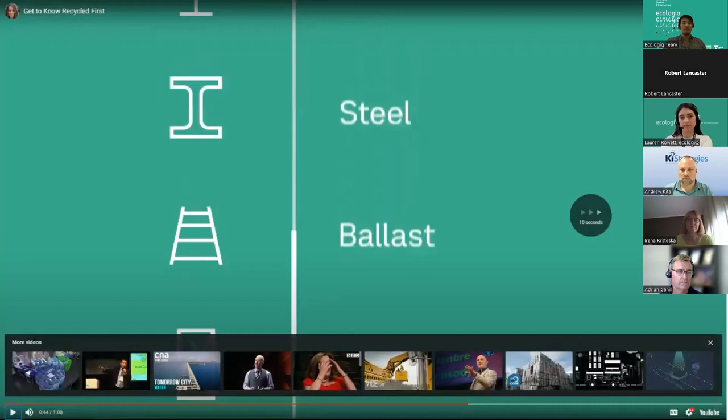The Recycled First policy. Recycled First will require transport infrastructure projects to optimise the use of Victorian crushed brick, crumb rubber and reclaimed asphalt pavement, taking precedence over virgin materials. For information, technical advice and support on bringing your sustainable project innovations to life, drop ecologiq a line. Recycled First, supporting purposely greener infrastructure.

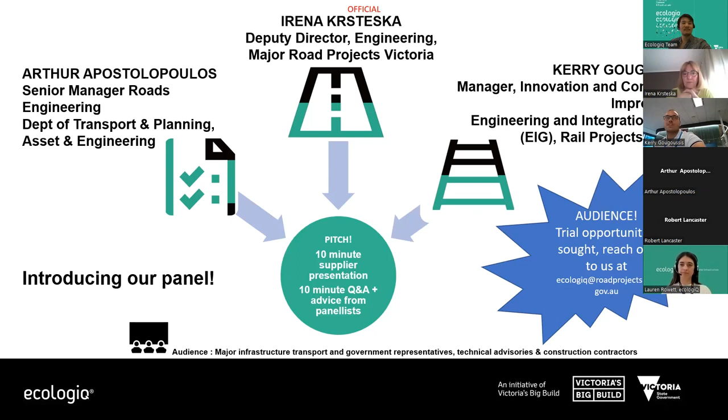Fantastic, thank you Kerry. So as you can see, very much a collaborative approach. I said earlier that these events are very much a call to action, because out there in the audience, you're working on live projects. There's opportunities to really push innovation, drive the uptake of these materials beyond compliance, as well as making them business as usual. So whether you're an asset owner, or working in design, engineering, or construction, the ecologiq here is very much about leveraging the big build opportunity and your projects to see circular outcomes for Victorian industry.

So I just want to go through a quick whirlwind tour of previous showcase participants. About 2 years ago, when we kicked off this series of events, we had a social enterprise called OC Connections come and put forward the idea of collecting old road bollards to convert them back into new ones. They launched at the end of last year, and that's now available - you can go onto their website. We're happy to see these bollards starting to be rolled out across the big build, as well as Melbourne Airport and other areas.

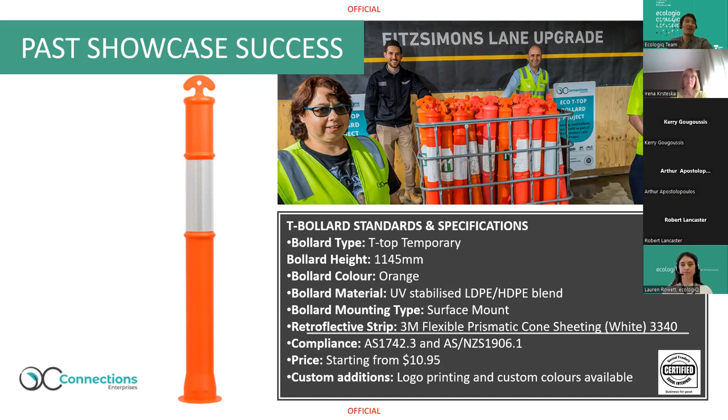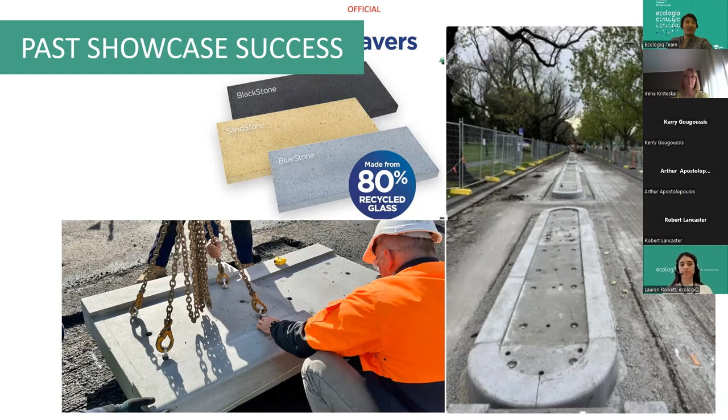Through the series, we've worked with the Plastics Industry Pipe Association, and we brought recycled plastic conduit pipes into the market here in Victoria. That's also available for projects working in this space - Vinidec is one of the manufacturers for these plastic pipes. We've also seen innovations such as Orca Civil's polymer concrete with recycled glass being used on the St Kilda Road laneway project, as the lane separators for the bike lanes there. So again, a showcase participant that's seeing that uptake.

I also want to take this opportunity to remind you, or if you haven't seen these before, there's plenty of innovations we're hoping to see adopted by the big build and your projects. The University of New South Wales Smart Centre have developed a great product called the Green Ceramic. This is a ceramic made from textiles and recycled glass, and it meets Australian building standards, so that's available.

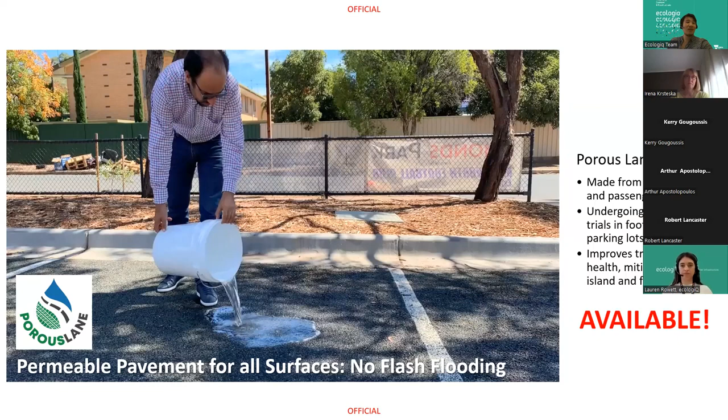We've had Porous Lane - a company that takes end-of-life tyres and creates a permeable pavement that can be used in car parks and other areas. I think some local councils have trialled it, and one of our projects is looking at adopting that. So from a flash flooding and heat mitigation perspective, a great product.

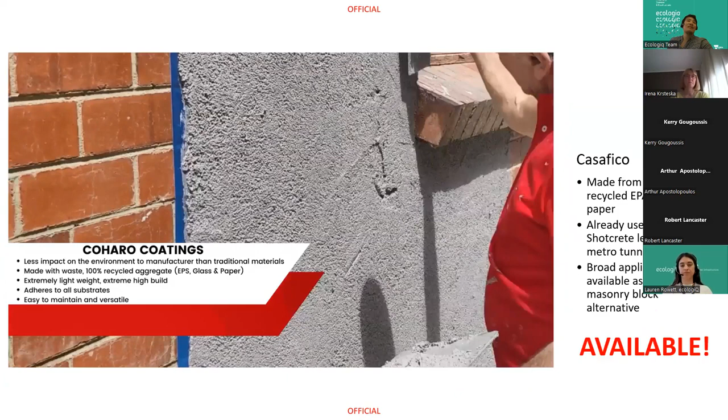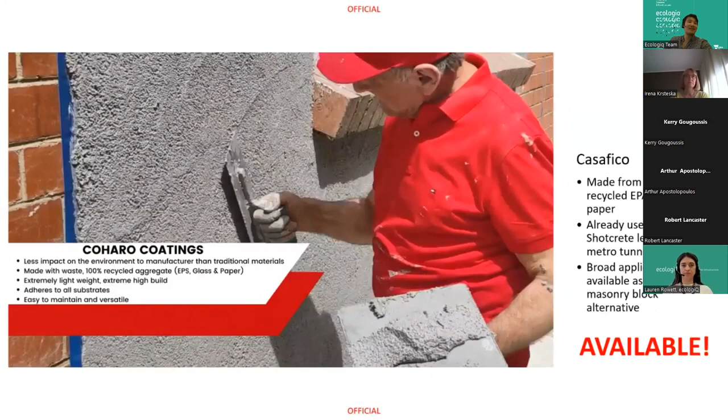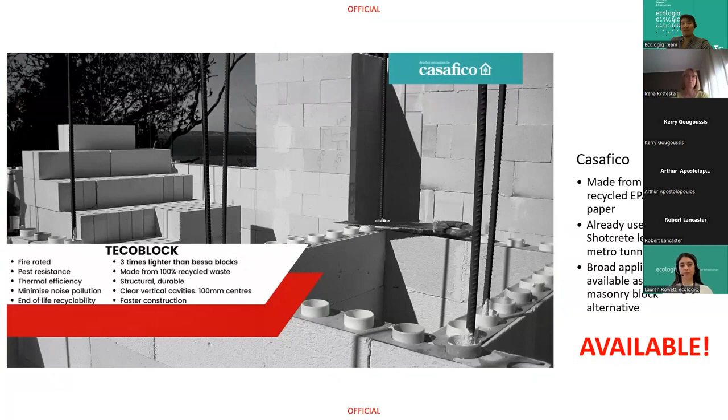We've got Casafico, who take polystyrene and other construction waste to make a levelling coat - it's now a shotcrete. You can see it's a very lightweight product that can be used to render and smooth out surfaces. They also use that same product mix to create building blocks, which are significantly lighter than traditional building blocks, and come with not just the green credentials, but safety benefits too when it comes to lightweight building materials.

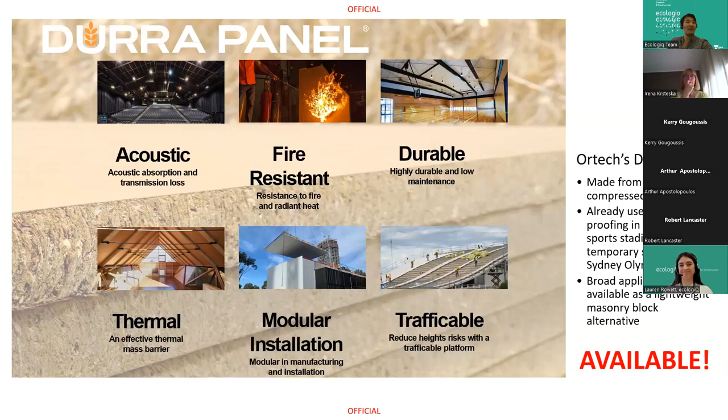Sometimes the innovations are very simple. This one's been around since World War II here in Victoria - the Durra panel, made by Ortech, is made from compressed straw. It can be used as acoustic panels and building panels, and it was actually used in the Sydney Olympics, with the Commonwealth Games coming around soon. I'd love to see this and other similar innovations adopted again here in Victoria.

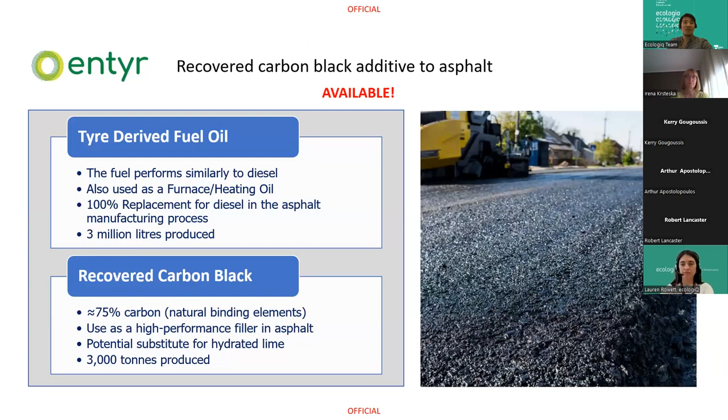Just last year, we had Entyr come along with their carbon char products - an asphalt additive we're looking to trial as a hydrated lime replacement. We're expecting to see improved rutting resistance and increased lifespan of the asphalt. This product is coming to Victoria - I think Alex Fraser at the moment are looking at working on a trial to deliver this. If you're out there, there's a lot of asphalt being poured on our projects, so it's a great opportunity to use and trial this as well.

So now, it's 10:40 sharp, so I'll kick off the main event. We'll have 4 presentations today from the industry. For the audience, you won't have video functionality, but you can ask questions of our presenters in the chat function.

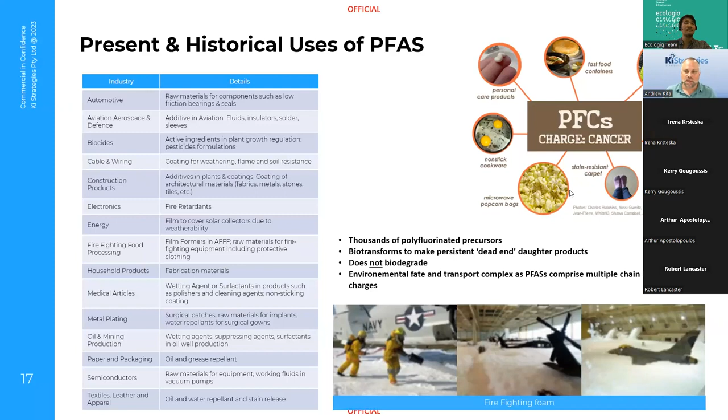It's a family of thousands of chemicals that are extremely persistent. They don't biodegrade, they're shown to bioaccumulate, some are suspected to be carcinogens. As the industry has been phasing out the use of these particular contaminants, solutions for remediating them and dealing with them, particularly with respect to building materials like concrete, asphalt, and other solids, just weren't available, weren't being developed. That's really what led us to develop the Ambiolock technology.

So next slide, please, Joy. What Ambiolock essentially is, is a physical, not a chemical, solution to being able to bind and encapsulate these PFAS-contaminated solids, whether they're recycled concretes, asphalts, sands, gravels, anything that can be used to create new structural materials, whether it's a pavement or a sub-base material. It's very effective at binding the PFAS to such a degree that it physically cannot leach out of that matrix.

It's not a one-size-fits-all solution in that there's no standard dosing. Unfortunately it does vary from project to project, because what we find is the concentrations of PFAS from site to site do vary, and also the distribution of types of PFAS compounds. They're long chain, they're shorter chain, and they have different properties. So there is some front-end bench scale testing required, which optimizes the dosing required, the performance of the solution, and has an impact obviously on the cost of the solution as well.

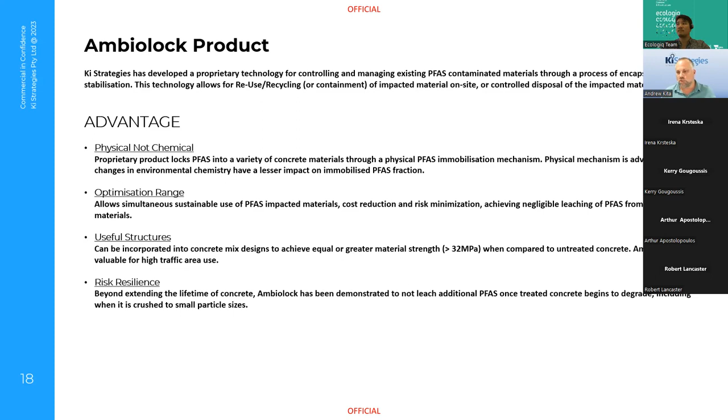But we have been able to successfully create sub-base materials that are many megapascals in strength. I think we had stabilized sand at close to 40 megapascals. Our 32 megapascal concrete mix has achieved results greater than 40 megapascals and extremely low permeability and water penetration results, which I'll talk about in a minute. Next slide, please, Joy.

It's a product designed to really meet this industry challenge of waste avoidance, reuse, recycling. It's something we've spoken about for decades, but industry has unfortunately been a little slow to move down that road, particularly with contaminated materials, and there's been far too many of these being shipped to landfill, often transported across multiple states in Australia for treatment and then subsequent landfill, when these materials could be cost effectively, environmentally incorporated into useful products or structures and other solutions that provide the community with significant benefit.

Next slide, please, Dawn. So one of the things we've been able to achieve is reducing the carbon footprint associated with using concrete as an encapsulation or stabilizing agent. We know that the cement industry is one of the largest emitters of CO2 globally. Ambiolock, when used in a concrete or a stabilized sub-base material, is able to significantly reduce the amount of Portland cement required or equivalent binder, and also through the use of recycled aggregates, reduce the footprint even further, as opposed to having to import virgin aggregates from offsite.

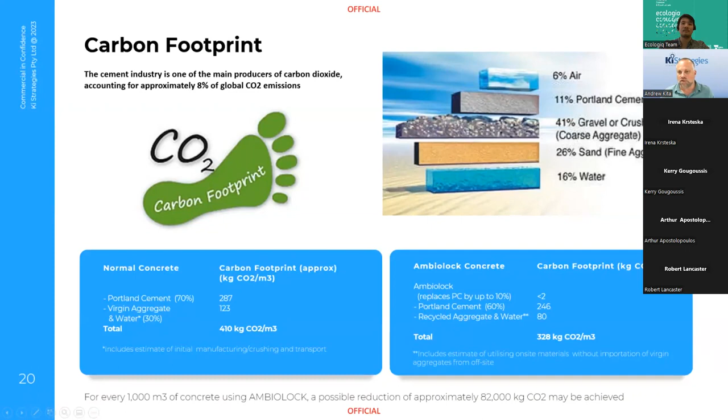We believe that a saving of around 20% in CO2 is achievable, possibly higher with stabilised sand and other materials where cement replacement can be greater. We think for every 1,000 cubic metres of concrete using Ambiolock, the savings are roughly 82 tonnes or thereabouts is the estimate. Next slide, please, Don.

So essentially, there's no limits to what Ambiolock can be used for. Any product that requires cement, concrete, and similar cementitious matrices to construct, be it roads, pavements, all types of structures, it essentially can be used anywhere where concrete is currently used. So the range of potential reuse and recycling options is extremely large.

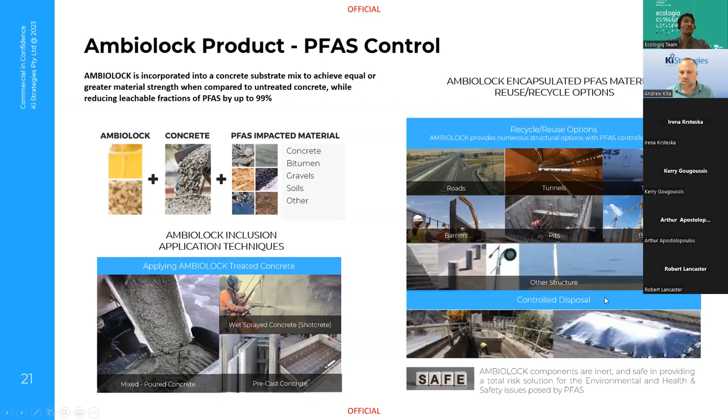So we did some laboratory scale testing to see what could be achieved, creating a large number of monoliths and putting those monoliths through a range of different tests to look at compressive strength, permeability, and the amount of PFAS leaching following treatment.

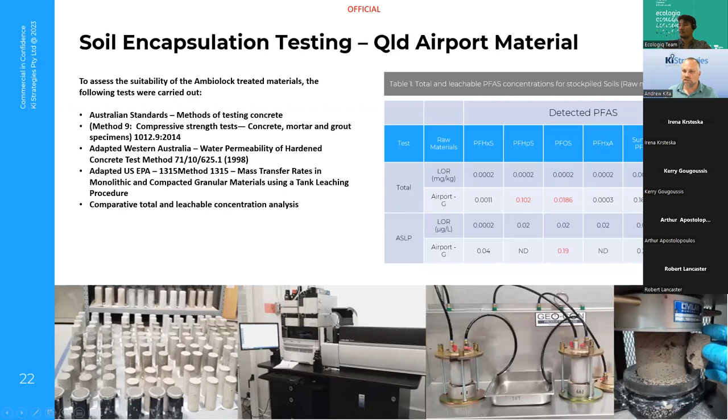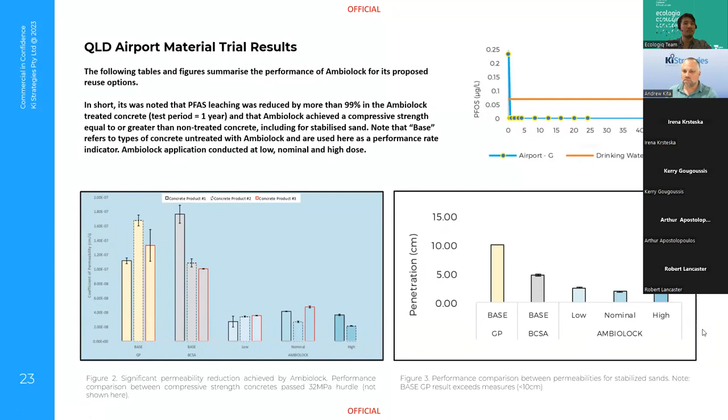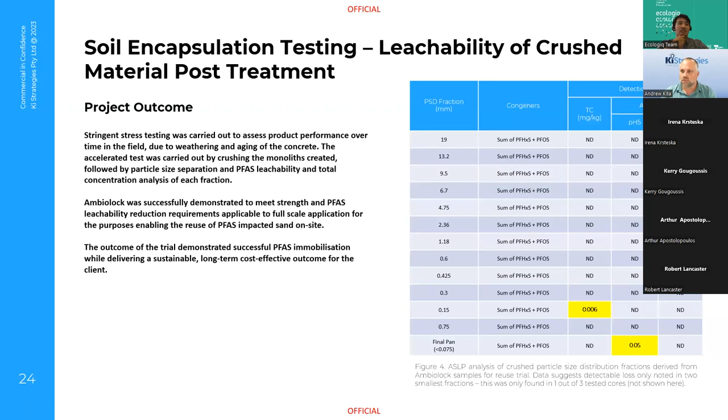Just a minute to go, Andrew. So just to summarise, sorry, just scratching through.

I think in a nutshell, there's a lot of considerations to be made when it comes to various projects, but for a small project we find the cost benefit relative to sending material to landfill is at least break even. For large projects we see savings in excess of 50% of what landfill disposal would cost to utilise those materials on site, sometimes well greater than 50%, whilst also providing a very effective environmental solution with other social benefits,

along with the partnerships that KiStrategies has.

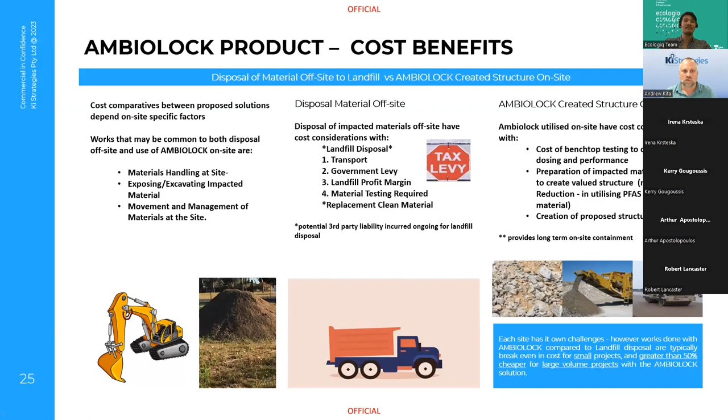This is the final slide. In summary, it's a solution that's not limited to PFAS, although that's been our focus because it's an area where there's been significant industry need. It is viable for other contaminants as well, and also works extremely well with concretes that have rapid set additives and cure in 24 hours or shorter, with no loss of effectiveness in terms of the leaching reduction.

A little bit about our motivation: the essence is we have a drive to take the plastic waste problem of the world and upcycle it, to actually utilise it in a way that has environmental benefits and also social and economic benefits. So that's our driver.

The way we're doing this is through our lightweight eco-aggregate that we call RESIN8. A couple of key takeaways about RESIN8: we accept all types of plastic, resins 1 through to 7, and we can take that plastic waste stream in a commingled and even dirty format. We were born from a desire to do ocean cleanup, so that's the sort of waste we started with, and we continue to utilise all forms of plastic waste. We don't just convert it into an aggregate that we hide in construction materials. RESIN8 is an eco-aggregate with standalone construction credentials — it has structural credentials, thermal values, fire rating improvements, it's lighter to work with, and of course the incredible environmental benefits. So that's what we're doing, creating RESIN8, our eco-aggregate.

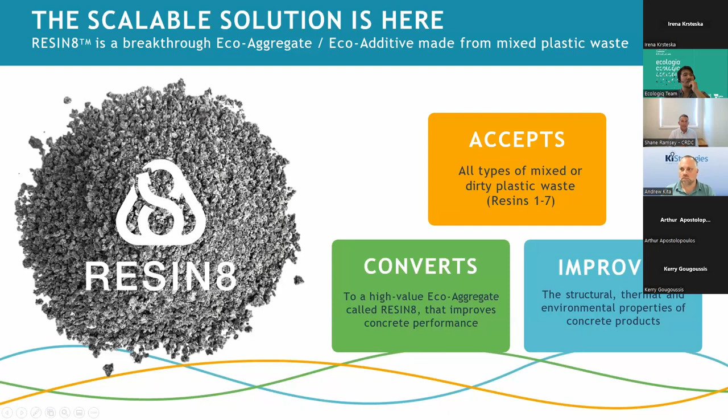So where is our plastic coming from? Just to give you an idea, currently we have full-scale commercial operations in South America, South Africa, and the United States, and pilot plant operations in Europe, Hong Kong, and Southeast Asia. In the coming months, we'll be commercialised and operational in Melbourne, Victoria. The waste streams we'll accept from the Victorian community will be exactly what we accept globally: industrial waste — post-industrial waste that often goes straight to landfill, agricultural waste that often goes straight to landfill — we take all of that. Environmental waste too; that's a real driver for us as an organisation — ocean cleanup, river cleanup waste, mixed, dirty, often not recycled. We take all of that waste and will continue to do so until environmental waste isn't a problem. And domestic waste — we take plastic waste from the domestic market. In the United States right now, we're running a full-scale project with an operational plant just outside of New York, where we capture all the waste of one community.

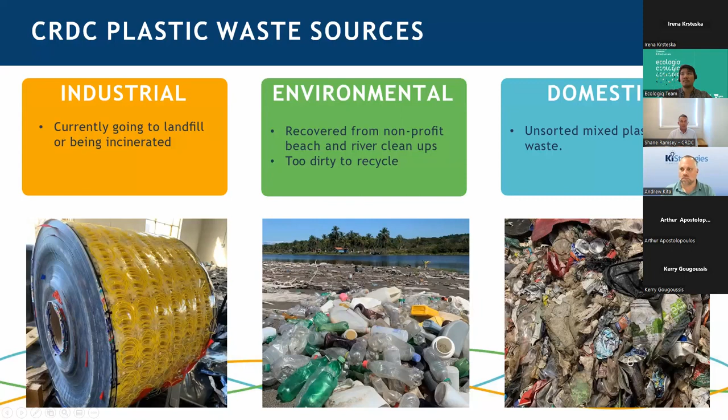And then that waste comes into our plant, is converted to RESIN8. That municipality then supports the purchase of RESIN8, which goes into their civil projects. So we've created a circular motion there, that the waste becomes part of the community's projects that enrich and appreciate in the community. So yeah, that's a takeaway.

We use all waste. What are we doing with it? Well, this slide highlights, I guess, at a scratch what we're doing with it. Concrete masonry units, bricks, blocks, pavers. Last year we did about 1.2 million bricks, blocks and pavers that we've got in real world applications. So those concrete masonry units have anywhere from 5 to 25% aggregate replacement with RESIN8.

And then of course we've core filled those walls, those applications, with concrete that contains RESIN8. So now we have structurally integral walls that have improved thermal values, have improved fire ratings, have a whole range of benefits, not the least is the environmental benefit. Precast concrete, right now we're in some large civil projects in South Africa, pipes, pits, drains, tilt-ups, and we have all the real-world testing data there.

And of course, pour in place concrete, which is something we're engaged in, from structural to non-structural concrete applications. So that's just, I guess, a snapshot of what we're engaged in. So maybe we'll just have a look at the next slide. Thanks, Louis.

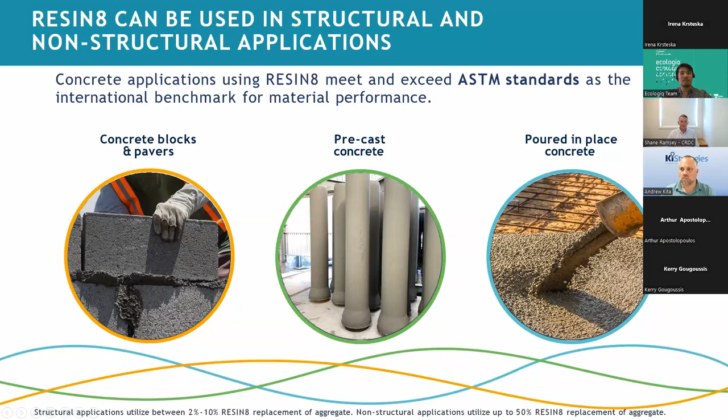So we have spent quite a few years, and we've rigorously tested RESIN8 and CRDC as a company. We've mentioned here in this slide ASTM testing, American Standard testing, as an international benchmark, because we are globally rolling out RESIN8. But we acknowledge and we appreciate the Australian standards are equally high and stringent, and rightly so. But just the reason we reference them here is because we've done thorough testing for fire, thermal, compressive strength, and we're doing that right here in Australia.

So right now we've partnered with Southern Cross University under the Commonwealth-backed Recirculator program. We're building a pilot facility in northern New South Wales, and we're engaged in a 2-year testing regime, which includes all the testing we've done globally, including our LCAs, and then we're running them again here in Australia. So LCAs, leachate, microplastics release.

But the takeaway here is once RESIN8 is in the concrete, it's not in there as a volume expander. It actually mechanically and chemically adheres, and it becomes an integral part of the matrix. The appearance stays the same, the workability stays the same, the end use looks exactly the same with all of the benefits that come. Thanks, Doi. Next slide.

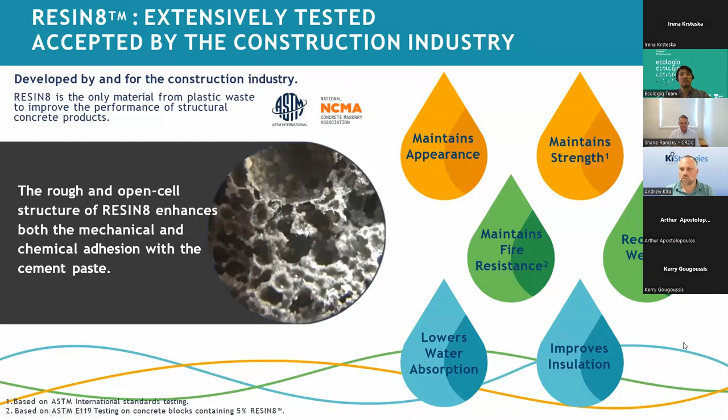The leachate I mentioned, microplastics release, we're thoroughly tested and documented and sail through those tests. But the key ones, we take all plastic, we divert it from landfill, and we utilise it in a construction commodity that has real value. So that's just an environmental snapshot. Now, we'll have a look at the next one.

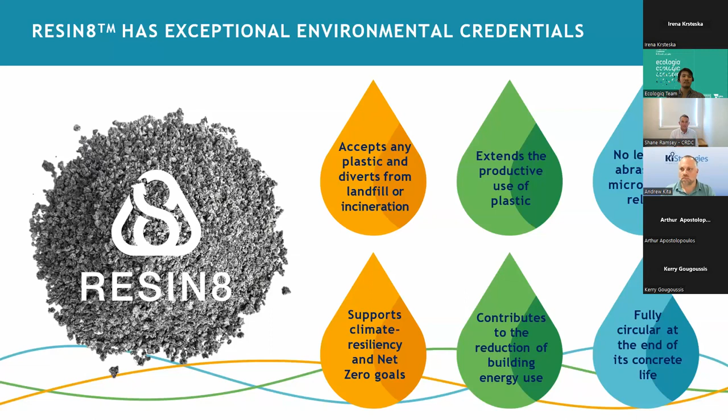So the bricks, blocks, pavers, concrete, slabs, footings have RESIN8 in them. Then we've educated the community on how to manage their plastic waste appropriately. Now their plastic waste is becoming their neighbours' homes. And that's something we're really proud of, working with Habitat for Humanity, and just speaks a little to our motivation to create a circularity where we eliminate as much plastic waste from the environment as possible, but then with what we're left with, we try and make something that's of value. We'll have our next slide.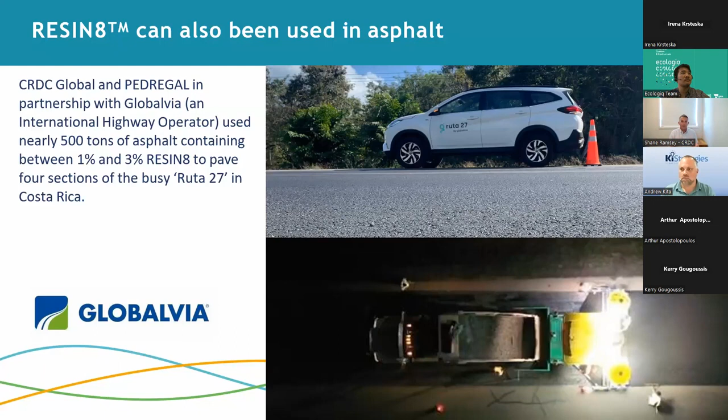And just our final slide. I think that's it, actually, Joyce.

So, friends, I guess the point that we're highlighting is we've got the runs on the board, but we have a real desire to do it here in Australia. And one of the questions from Ecologiq is how can we move this down the road? Well, with our full-scale plant coming online in 2023 in Melbourne, we acknowledge the support that Ecologiq already provides around standards, support with standard specifications, compliance, and standard development in light of recent innovation.

So we're looking to continue those relationships and really draw off the experience of the industry. What do they need? How do we comply? And then to go in harmony with that, what I guess we're looking for in Australia is opportunity to walk into real-world projects, to actually roll out RESIN8 in real-world testing applications so that we can not blindly say what we think it's going to do, but we can build off our global experience so we know what we're expecting.

The companies we work with know what to expect, but we can demonstrate it right here in Australia with Victorian waste in Victorian projects using Victorian construction methods. And that's where we're leaning on you and your organisations to help us.

Thanks, Doi. Not a problem. Thank you, Shane. Over to the panel. Any first takers? Otherwise, I might go alphabetical. I do, Doi. I've got a few questions. Oh, Kerry. Kerry, then Irena. Kerry first. Okay. Shane, thanks a lot.

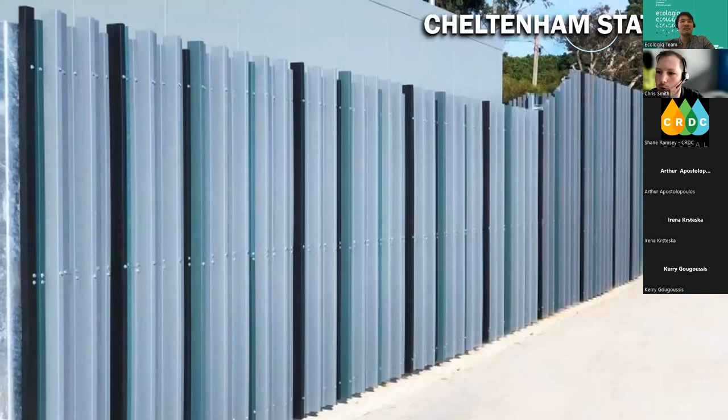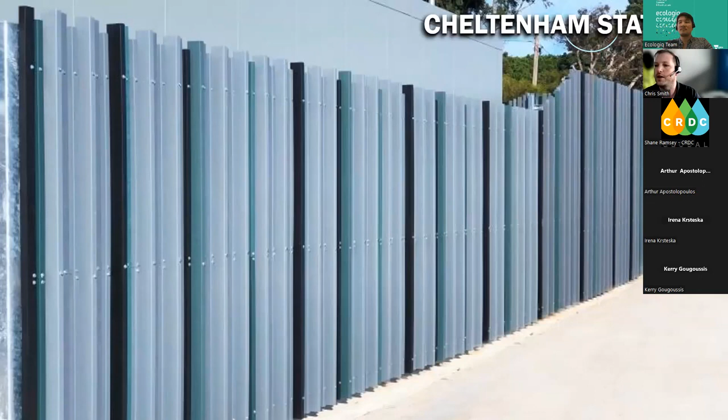The rest of the slides are all Ballarat product, made in Ballarat by us. This one's a good example of our profiles. We make a number of just rectangular and square dimensions, for want of a better word, plastic lumber gets used a lot. But this is a creative use of it. This was a level crossing removal in Cheltenham, where they've used the profiles as vertical battens around a substation. Not only have they utilised a single profile, they've used a number of the different dimensions to create visual interest with the profiles jutting out from the fence railing, as well as the alternating colours to create the patterns there. This isn't an overly uncommon use for our product, but I don't think it's advertised a lot, so I thought it'd be an interesting one to show.

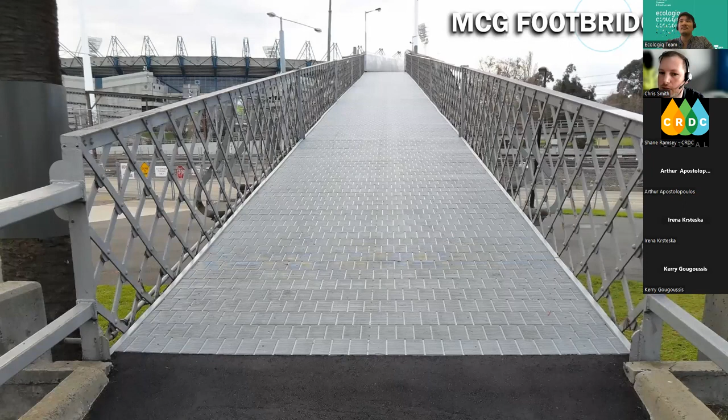On the next one is probably one of our main infrastructure examples, I guess. This was done over 12 years ago, and it's still there outside the MCG. It actually crosses over Jolimont Avenue, I believe, to Jolimont Station. It's quite a steep ramp up to that overpass, and it goes straight onto the grounds of the MCG. That was done over 12 years ago, and interestingly, before we could do our EnduroGrip. So what they've done here, if you go and visit that installation today, you'll see there's a number of steel anti-slip, or possibly aluminium powder-coated anti-slip plates that have been installed along the top of the decking.

That's due to the angle of the ramp being quite steep, and at that stage we couldn't create the anti-slip surface on top of our EnduroPlank, so they've come up with that solution for that installation. I was there probably a month or two ago and had a look at the EnduroPlank underneath those anti-slip plates. It still looks the same as the day it went in, barely worn at all. That's one of the advantages of utilizing plastic in the forms we've been speaking about today - it's such a durable, long-lasting material. That's one reason it's an issue in the environment, because it doesn't break down or degrade, but when you put it into a constructive use, you have the advantage of it not breaking down. So that's one of our main infrastructure installations in Victoria.

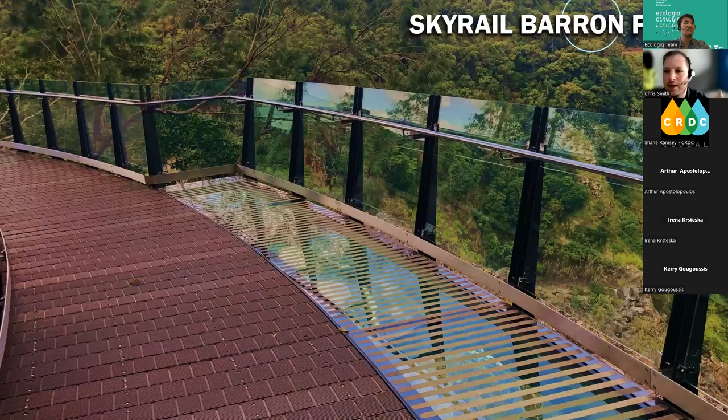On the next slide, this one is quite high-profile in Queensland. It overlooks a big gorge on a tourist attraction and walking trail in northern Queensland - it's Barron Falls. This is cantilevered over a cliff, and they've used our brown EnduroPlank as part of the installation. You'll find a lot of these installations use EnduroPlank just due to its durability and long-lasting aspects, because it doesn't need the high maintenance requirements. So for things with high traffic, low maintenance is obviously a beneficial aspect - you don't have to continually go back and repair anything. For this purpose, it's great.

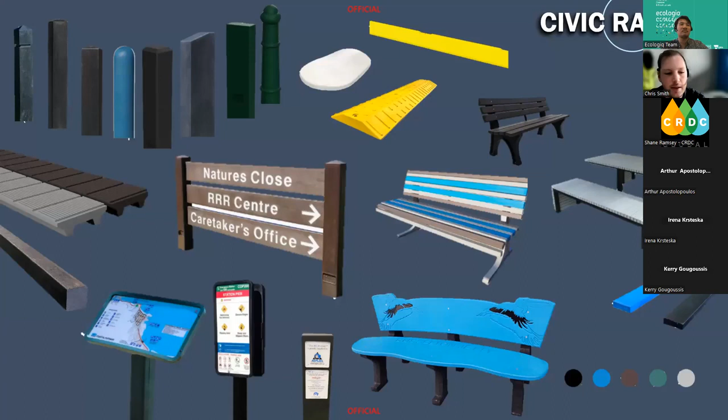On the next one, we move into the range of products. We've got two arms to the business. The one we're best known for is our civic range - furniture items, decking, and bollards, our three core product ranges. But we also do profiles, different signage, and a few traffic control items like wheel stops, which is a growing market with a good chance to succeed and become one of those core items like the bollards. I've added the color range things can come in, but this is just a brief summary of the products we do.

In total, it's over 200 products that we make, and that includes the next slide, which is what we're probably less known for, but also a big part of the business. The reason is we run this side of the business through distributors - we don't actively sell direct to the market with these items, it's all done through distributors. This is our civil range - we manufacture hydrants, marker posts, valve surrounds, wedge blocks, as you can see in the bottom corner, and cable stands. There are a number of civil items we manufacture that you wouldn't think are made of recycled plastic, but you've probably walked over many of them in estates and new estate builds without realising you're walking over Victoria's waste. And that's pretty much it.

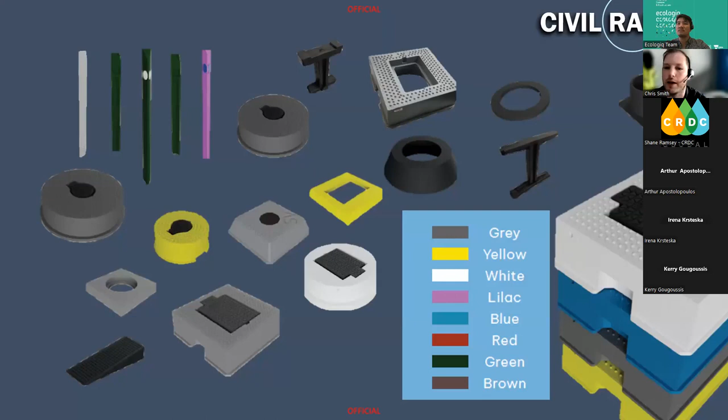With our products, and especially the civil products, you can see some of these designs are a bit elaborate in terms of the shape of the product and the texture on top. That just goes to the strength of what we're able to do with our injection molding, and sort of leads on to the next point that I was going to raise.

We'd love to work with you, and we invite all discussions on products. So whilst we've got a standard range of products that we make, we're also open to discussions on products that may be required in high volumes or custom situations that we can work with any of the big build projects on. So if there's something that has piqued your interest, or you've got an idea from left field that may be useful, definitely come to us with the discussion, and we can investigate whether it's something we can assist on. And that's it.

Perfect timing, Chris, that's 10 minutes, so thank you. And great to see it used in such amazing locations. I think Arthur, since you've got your camera on first, fire away.

Thanks, Chris. Again, very good presentation, and I think there's plenty of opportunities in that road furniture space where your product can be utilised. Again, that's where we should be concentrating on. In the off-road space, there is a plastic noise walls specification being produced at the moment, and you're probably aware that a number of noise walls have been constructed out of recycled plastic. So just for your information, that's another avenue where every time there's a big build, there's likely to be noise walls installed as part of that. So what you've presented is very good, well done.

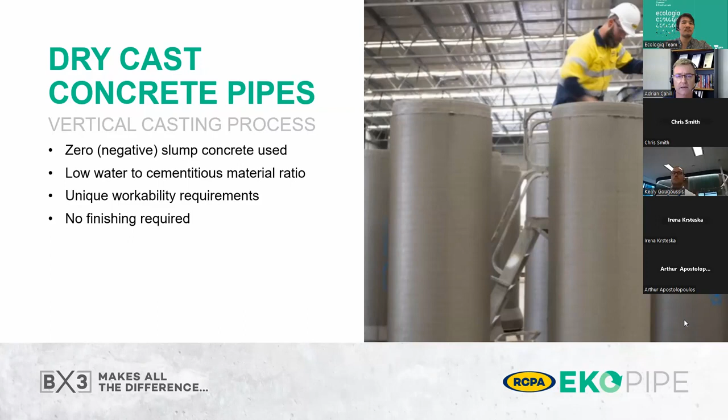And there's also basically no finishing requirements that are used there. So you'll see that's a picture of one of our guys dressing the top of a pipe that has literally come out of a mold like seconds before that. But that's about it. This process is also used for items such as concrete masonry blocks, concrete pits, and a range of other concrete products around the world. So yeah, next one please, Toy.

So I just thought I'd touch on what we're talking about here. RCPA has developed a product called EKOPIPE, and we've named the technology that's behind that BX3. There is a reason for it, but I won't dive into that today. But we want to sort of flag, because people may not have heard of RCPA, so people sort of go, well, who's RCPA? Why have they been able to develop this concrete pipe? And it hasn't been one of the majors that's come up with this.

Part of the reason is that dry cast pipes kind of suit this technology more than traditional concrete. Due to those workability and finishing requirements being different, that gives us the opportunity to introduce processes or materials into the concrete mix that may not work in a flat work or a different kind of precast operation. The other part that is significantly different, and I'll talk a bit more about this in a couple of slides time, is that pipes are a fairly unique structure in that we actually test every batch of pipes that are made. There's a physical load test that's done usually multiple times per day. We test the concrete pipe itself to ensure that it's achieving its structural performance that's required.

Yep, next one, please.

So I'll talk a little bit about the development. People who've been around Victoria for a decade or more may recall RCPA did actually introduce a product called ECP, which was a full geopolymer concrete pipe probably around 15 years ago, 12 to 15 years ago. The problem with geopolymer and traditional alkali activated concrete, geopolymer concretes, is they're not very user-friendly, in short. They use some pretty aggressive materials. I know there's been developments and changes with powder systems nowadays, but they are significantly higher in alkalinity than standard concrete. They also require quite substantial curing control. They're very sensitive to curing, and those two elements combined pretty much meant that we weren't happy with that sort of technology.

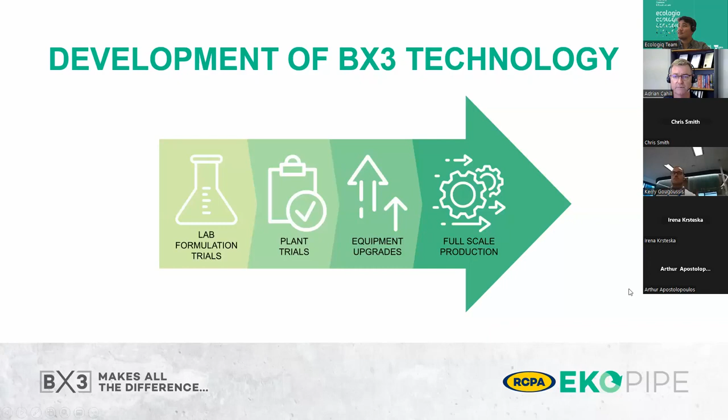So once we had the lab concrete working in the laboratory environment, we moved to plant trials, and it sort of exceeded our wildest expectations in terms of how well it worked. So we were pretty much then in a position where we needed to immediately move to do some equipment upgrades to get us into full-scale production. Now that's actually been a bit of a challenge with all the run out of COVID. A lot of our equipment comes in from overseas, so it's taken a bit longer than we would have liked, but we're now in a position to start scaling up into full production going forwards.

We've done initial LCA modelling, or life cycle assessment modelling, for EKOPIPE concrete. What it shows, as you can see on the graphs, is a pretty substantial reduction in concrete emissions for embodied carbon per tonne of concrete. That's achieved through greater than 80% reduction in Portland cement, and it depends on the location - there's a bit of variability there. We are talking about the concrete that's actually being made in those plants.

So these are not abstract numbers, they're real numbers, but it does translate to a greater than 50% reduction in the CO2e for the concrete itself.

Just before we move to the next slide - when we go to make the pipe, obviously we're using steel as reinforcing in the pipe. Now while a substantial percentage of that steel is recycled material, there is still a CO2e contribution from the steel that goes into the finished product. But what we land on, depending upon the pipe diameter and pipe class, is around a 45 to 50% reduction in CO2 for the actual pipe as produced.

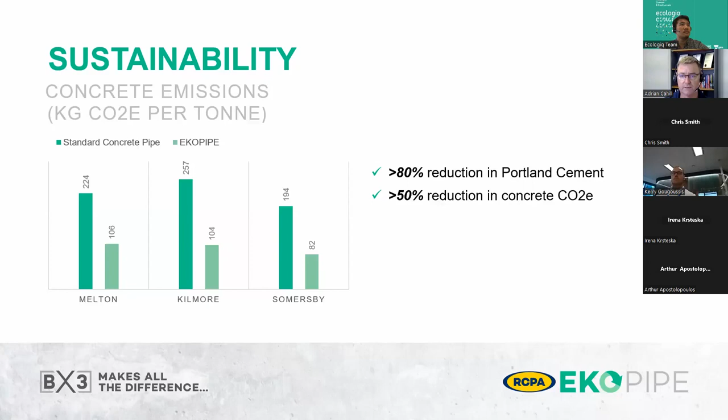So in terms of the next steps, as I mentioned, we've got the EPD just awaiting final verification and publication through EPD Australasia. Hopefully that'll be done in the next couple of weeks. We will be developing an EPD for EKOPIPE very soon - we just need to get a few more production runs under our belt, so to speak, and continue gathering data to develop that EPD.

And then future work - we're not going to stop now. We've had a really big win in terms of the cementitious content, but there's a lot of opportunities to look at alternative or recycled aggregates. I'm pretty interested to talk to Shane from Resonate in due course about that.

One thing that doing an EPD or a life cycle assessment does is give you a very good insight into your energy inputs through a manufacturing process, and that's a big contributor to the EPD or the CO2e for pipe manufacturing - the actual production process. So we look to optimize those energy inputs and introduce elements such as solar through our factories, and then optimize concrete mix designs, continuing to work on that. So we see this as just the first step in a longer term road around developing our BX3 technology.

I'll just touch on a couple of things related to the pipe itself. The two main things we have to assess for compliance with Australian standards is the strength of the product. Typically, concrete is measured by a compressive load test - you'll see that image on the left-hand side of the screen. It's actually not required for making pipes; we don't have to do a compressive strength test of our concrete. What we do have to do is a load test, and the photo on the right shows an indicative setup for a load test of a concrete pipe.

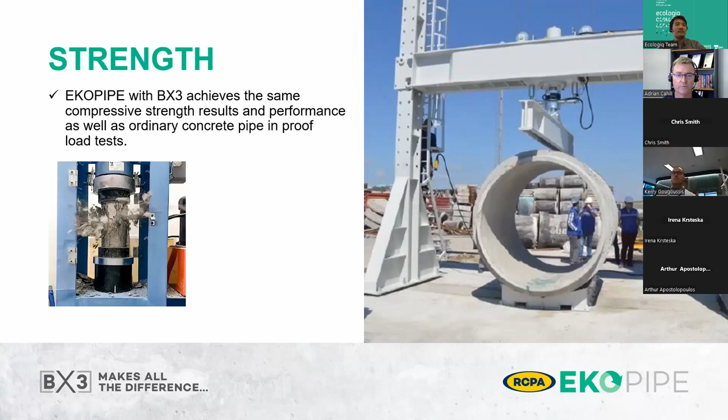The other test is the durability, and durability is the big word, right? There's no point saving a bit of carbon, whether it's using recycled material or otherwise, if you have to replace that asset in less time than you would for the original one. Any gains you get there can be easily lost through extra maintenance or replacement. So durability is the key thing.

And the key test used in the Australian standard for pipe manufacture is the water absorption test. It's akin to the VPV test for those concrete technologists in Vic, but slightly different. What we do is take the test sample from the wall of the pipe - we don't use a cylinder cast in a mold, we actually take a sample from the pipe itself.

The limit in the standard is 6% absorption, that's what we're allowed, we have to be below that. Our typical concrete range is in the order of 4 to 5% testing. Our tests with EKOPIPE concrete to date have been almost half, so we get absorptions of 2 to 3%. For those familiar with VPV numbers, we're generally in the single digits, around 8 to 9%. So very good numbers for that.

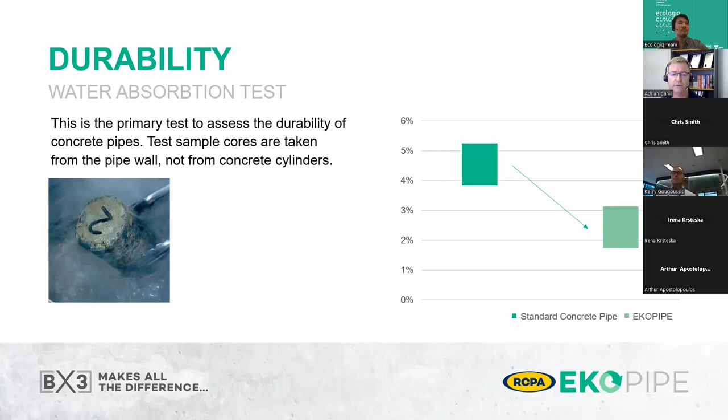And to make sure we're looking at the broader picture, not just focused on pipe concrete, we're also doing testing on chloride migration, confirming that the EKOPIPE cementitious binder still functions as an alkali silica mitigation, and continuing to investigate other attributes there.

So I've just got, we'll stop on this slide, we won't go to the next one. I just wanted to, in summary, and I think I'm pretty much bang on time.

Just to say, RCPA is very pleased to be able to introduce this sort of revolution in concrete pipes. We're certainly one of the first in the world to introduce a concrete pipe with a significant reduction in Portland cement usage. We recognise that concrete continues to play a critical role in our built environment, due to the fact that it has those unique and proven properties and almost a guaranteed service life if correctly installed. So we're really pleased to introduce EKOPIPE with BX3.

We have dropped Portland cement use quite significantly. We've introduced a significant reduction in carbon. We haven't compromised on the strength or service life that you expected. Very keen to partner up with asset owners in Victoria and across Australia to get this new product in the ground. Thanks for the opportunity to present, and I welcome any questions.

Thanks, Adrian. Arthur, I think you may have pipped Kerry to the post. Yeah, thanks, and thanks, Adrian.

So certainly it's another very good presentation, they've been excellent today. And as you're probably aware, Adrian, in Victoria, supplementary cementitious materials have been able to replace GP cement since the early 90s, and a number of our specifications allow the use of that product. So certainly from a Department of Transport and Planning point of view, very supportive of these types of initiatives and innovations. That's very good.